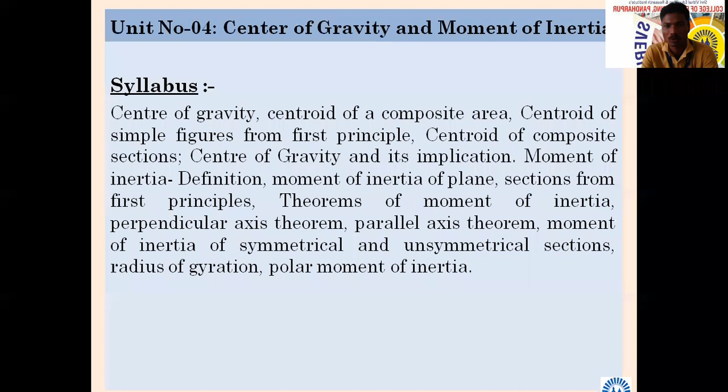Then we have seen the difference between centroid and center of gravity. Centroid is mainly related to a 2D diagram, or we can say a plane, while center of gravity is related to 3D. But in our practical use, we consider both terms as one and the same; there is no difference. So here I have given the formula.

Where I have marked a star, I have emphasized it many times, one, two, three times. This formula is necessary to apply while calculating centroid or center of gravity for a composite figure. We have seen the basic figures for which we can find CG directly, but if our figure consists of a number of basic figures combined, then we have to apply this formula by finding the center of gravity one by one, in that way.

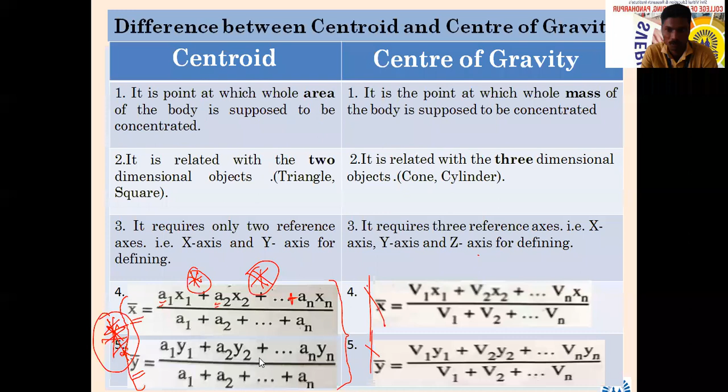After that we have seen two terms: the centroidal axis and the reference axis. Very simple: if the axis passes through the center of gravity, it is called the centroidal axis. It's as simple as that. On the other hand, what is the reference axis? The reference axis is the one which is parallel to the centroidal axis. We discussed a few things here.

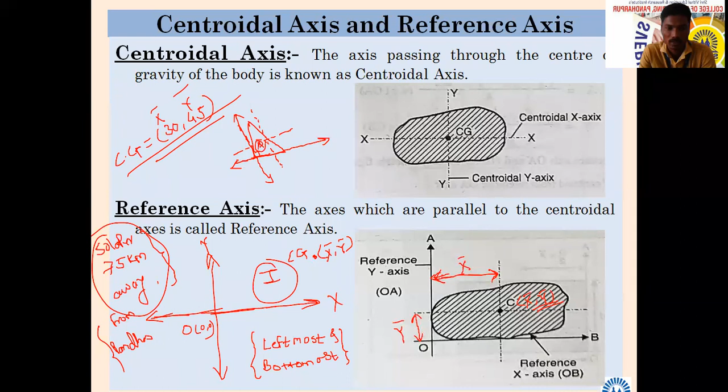While taking the reference axis, we have to take utmost care that our object remains in the first quadrant. I have written this here, I have not erased anything we discussed. So that care we have to take; in other words, while selecting the reference axis, we have to select the bottommost point of the object and the leftmost point of the object. These two things we have to take care of while selecting the reference axis—one is the centroidal axis, the other is the reference axis.

Then we have seen the centroid of standard geometries. This chart is most important, I have told you this earlier too, this chart is most important. Suppose you want to solve or attempt any problem related to this chapter, then this chart is most important.

Without this chart, you cannot solve any problem. There were some questions yesterday related to this chart, intentional. Not only standard, some of the questions were standard figure, but some of the figures I have rotated.

So have you solved, or are you able to solve that question from yesterday? Yes sir, some semicircle, some quarter circle, maybe triangle, right angle triangle, maybe in rotated position. One of the figures I had kept was symmetrical. I don't know whether you were able to apply your logic of symmetry or not. It was not necessary to calculate anything.

One figure I have given something like this in the problem. I don't know whether you are remembering it or not. Maybe there was a rectangle, something like this, and here there is a semicircle, and here also there is a semicircle. So this figure was symmetrical about both axes. So its centroid will be here at the center. I will write here one, for your information.

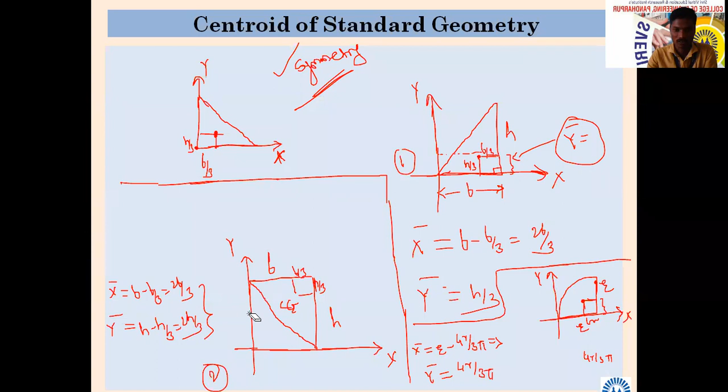Then we actually solved the problems related to centroid or center of gravity. So whatever problems are there, we actually solved it. Whatever it is there in the syllabus. So if object is symmetrical, center of gravity will lie on axis of symmetry. We have to check whether object is symmetrical, not necessary in all cases. So at your first look, you can see how it is, then you can proceed.

So first, what we have to do? Suppose we want to find the center of gravity for any object, what we have to do? First, we have to convert that object into our standard geometrical parts. So if it is possible to convert it into standard geometrical parts, then you have to convert it. Then accordingly, you have to find two things for each standard geometrical part. Which two things is it necessary to find for each geometrical part?

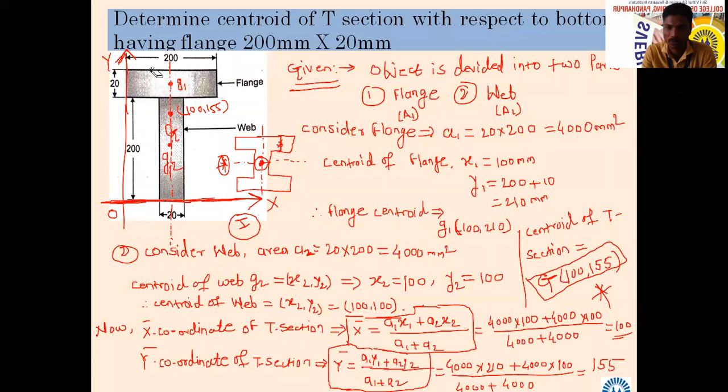Then we can apply the formula. X bar is equal to, what is the formula to find X bar? A composite figure, I will say, the figure which is made with the standard parts. Composite figure, what is that? A1 x1 plus A2 x2 up to so on, divided by A1 plus A2 up to so on. Very good. A1 x1 plus A2 x2, whatever number of parts are there, divided by A1 plus A2, whatever number of parts are there.

Further, we have solved such problems. One T section we have solved, then C section also we have solved. I think this third one, the composite figure made up of rectangle, triangle, rectangle, semicircle, this also we have solved.

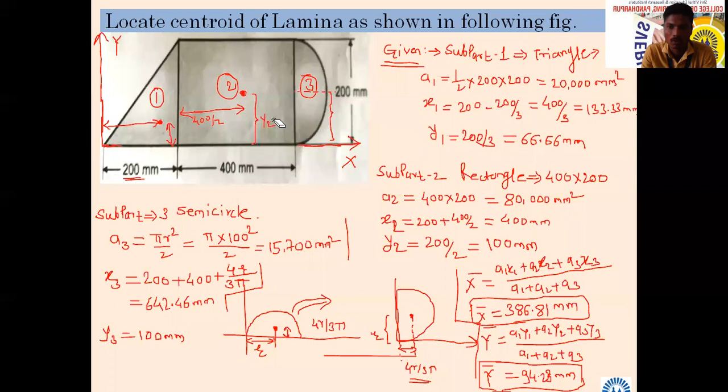Then we came up to this. I think we came up to this. Is it correct? Yes, sir. Okay.

For this question, what is necessary? Just check, read carefully. Determine the centroid of shaded area as shown in the following figure. Which is the shaded area? You can see in the figure which one is the shaded area. Shaded means where there are lines in the area. We need to find the centroid of that figure. Are you able to see the figure and problem statement?

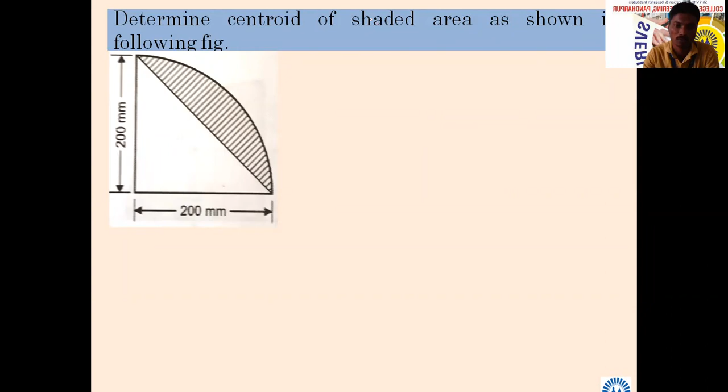Yes, sir. So once the problem statement is in front of us, what do we have to do? Once the problem statement is in front of you, we have to convert it into a standard geometrical part, for which we know how to find the centroid.

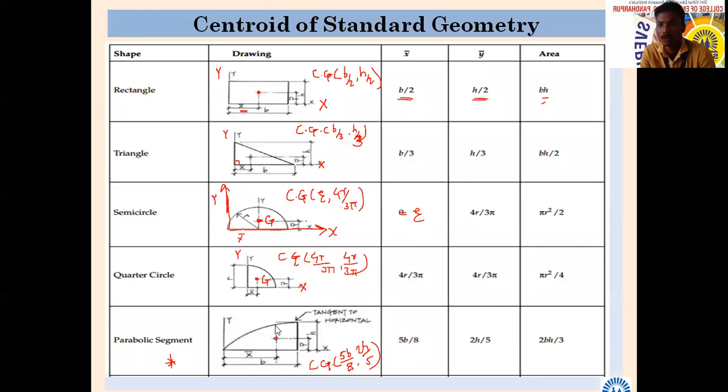By subtraction. By subtraction. Okay, one answer came. With the help of subtraction, we can get it. How? Who told this answer? Okay, who is that, from the circle? Okay, Manasi, go ahead. Tell me how we can get the shaded area by subtraction.

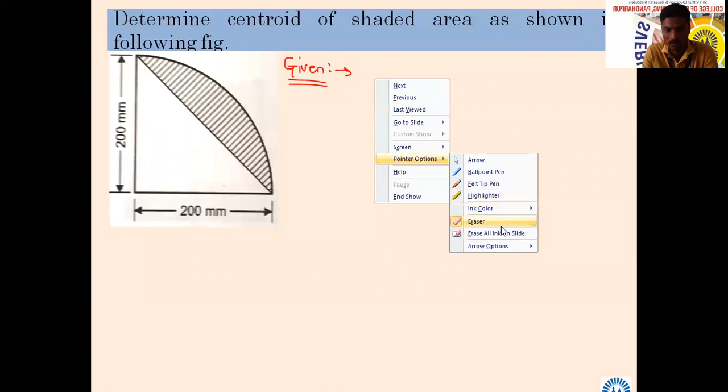Formula. Which formula do you want to tell? A1 x1 minus A2 x2 upon A1 minus A2.

Okay, this, you have told this: A1 x1 minus A2 x2, divided by A1 minus A2. Okay.

Okay, we are going to subtract. You are correct, I want this, but we will go step by step. No, why go directly? You are correct, I'm not saying you are wrong, but we will go step by step. No, what is that?

So shaded area, how will we get the shaded area? That we will see. So how will we get it? Just check: area of quarter circle minus area of triangle. Very good. What is that? I will write it in short here. Shaded area equal to area of what?

Quarter area of circle. I will write in short, a quarter, whatever, or 1/4 circle, I will write.

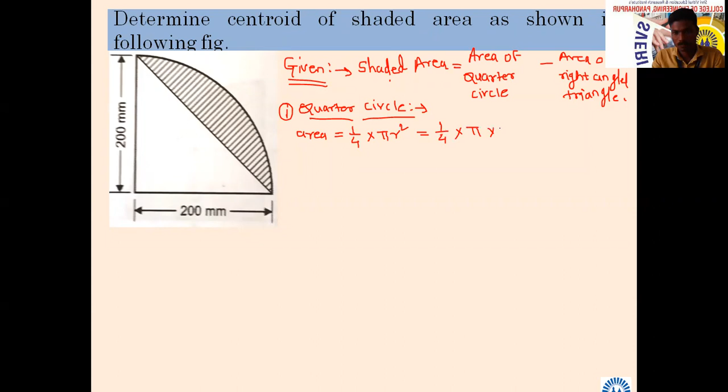200? Is it 200? Are you with me sir? Calculate this area for the quarter circle. Calculate fast and tell me the exact value after decimal points - two things you have to tell.

Are you able to find the area of the quarter circle? I have to find that. 31415.92 mm square. Is it correct? Yes, sir.

Centroid now. Centroid of whose centroid do I want to find? Centroid of quarter circle. So what will that centroid be? Directly it is like semicircle. What is that?

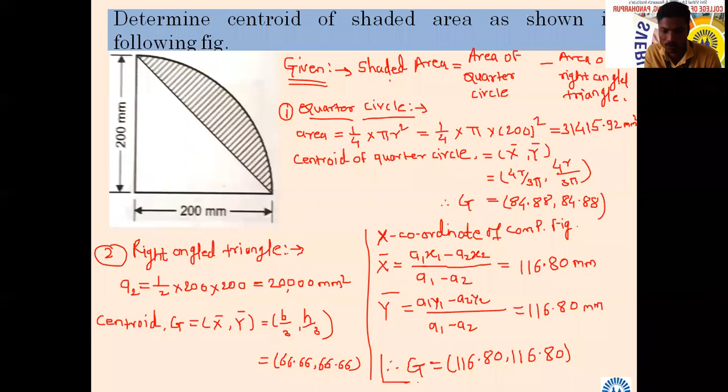Whether you were knowing how to find this. But we have not taken any problem involving subtraction, so that's why I solved it once again. Otherwise I would have taken one problem for subtraction and not asked anyone. I don't know whether everybody has solved it or not, so I solved it quickly. Let it be, so this will be our answer. Anybody got some other answer than this, or is the answer the same?

Whether somebody has a different point? No, same point sir. It doesn't matter, after the decimal point nothing to worry about. Before the decimal point, is there any difference?

Okay, have you got this? Shall I give one problem for solving right now? Sir, is there any problem in this?

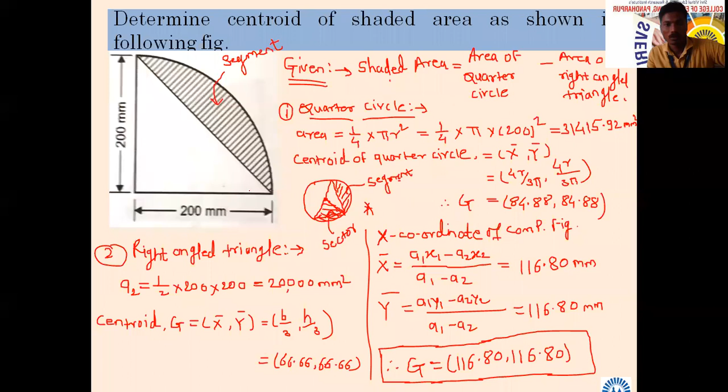Next problem, let us see. Very simple again. How many are there, almost 59.

Roll number 54, Nare, Siddharth, are you there? Siddharth, 54, will you unmute yourself? Siddharth Nare. Very good, random selection of one student. He is also not responding. Akash, roll number 58.

Determine the centroid, continue, of a shaded area as shown in the following figure. Very good, nothing to worry in this. Problem statement will remain same - determine the centroid of shaded area as shown in the following figure.

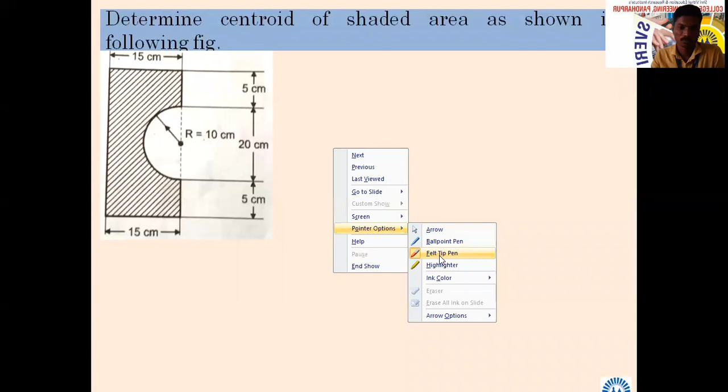Is it possible, Akash, for you to solve this problem? Very simple. If you'll apply your mind, then is it possible to solve this problem? Yes, sir, just check.

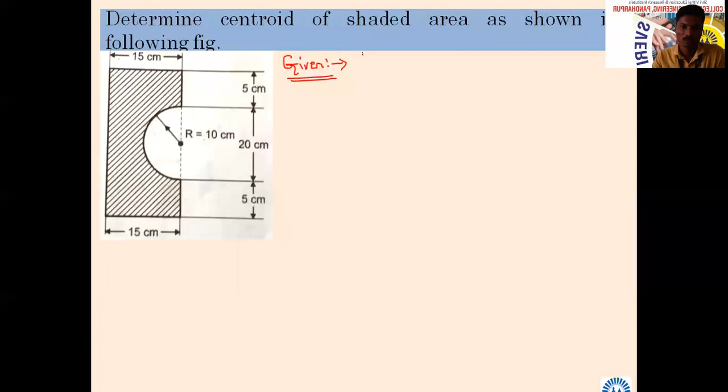Which two standard geometries are here? If I will write - actually this is not a standard formula, for our information I am writing shaded area equal to shaded area equal to. What will be the formula? It will become this for the shaded area. Or will you think for a while? Do you want to take some time?

Hello, am I audible? I'm not getting - are you understanding? Are you writing what you are doing right now? What formula will become for shaded area? Who will tell?

What will be our formula? Rutuja Gaikwad, roll number 7. Area of? So area of rectangle minus area of semicircle. Yes sir, minus area of semicircle. Area of semicircle, area of semicircle.

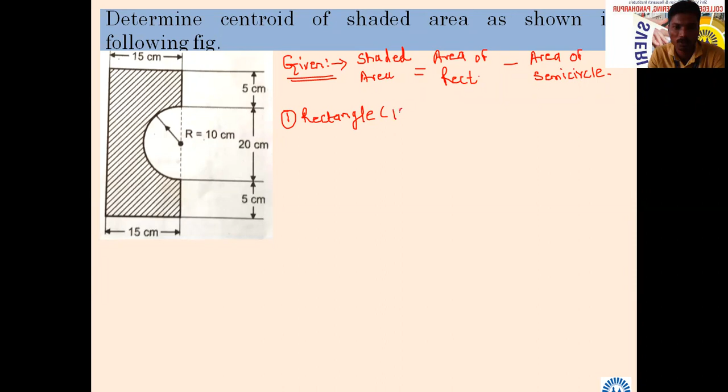Very good, very simple then. First geometry will become a rectangle. How much is its side? 15 into how much, horizontal is 15. What about vertical? 30, 30, okay. For this you have to find certain things.

And number 2, semicircle. Semicircle having radius 10, no? R equal to 10.

Will you solve this? I will ask a random answer. Will you take your time? We'll solve. Is it possible for you to solve this? Either say yes, no, otherwise I have to solve this. Yes sir, solving, yes sir. Okay, you take your time, don't make mistake and then solve.

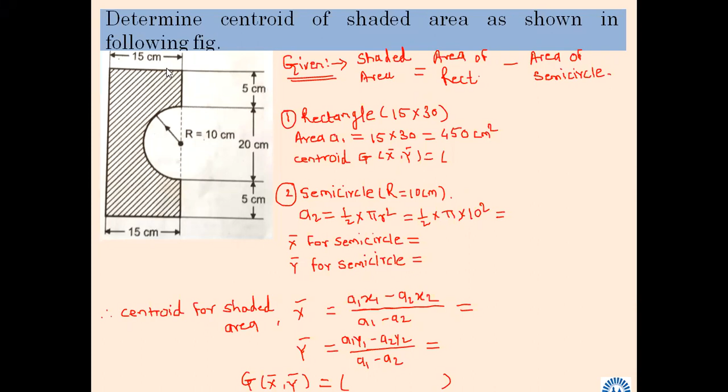Is it over? Yes, sir. Okay.

Mahesh, roll number 38, what is your answer? Have you calculated? 5.57 and 15. 3 point? 5.57, okay. And how much? 15. Okay, good.

Any other? Anybody want to tell, other than this? 5.74, okay. And what is y bar? Who was telling? What about y bar then? Rutuja, I think you are telling. Kavadi, sir, 14. Okay, any other?

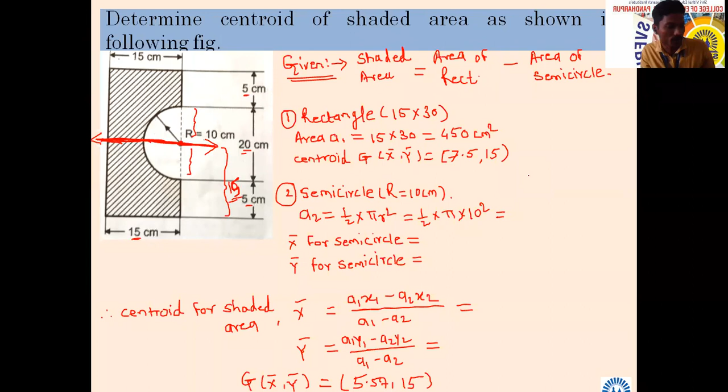For rectangle we have seen the formula. Next, semicircle, A2 is equal to - why have we taken 1/2 pi r square? Because there is a semicircle and we know the value of r, it is given in the problem as 10. What is the area? Will you calculate or do I have to calculate? Calculated. Okay tell me how much it is. 157.07, 157.42 centimeters square.

Very simple. So next, x bar for the semicircle - how much will it be? Who will tell? We have seen for the semicircle standard figure, immediately it should come in front of your eyes. This is x bar, x axis, this is y axis, and our standard figure is something like this.

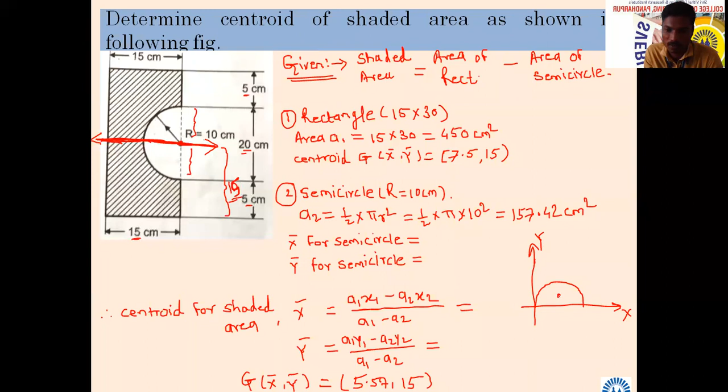Yes yes, okay, here it is a semicircle. This figure should immediately come in front of your eyes. We know how to find its x bar and how to find its y bar. X bar is how much? It is in this way - this x bar will be r equal to r, for this figure I am telling r. And what about its y bar?

What is the formula for y bar? This distance, how much is it, we have seen - what is this? 4r divided by 3 pi, r divided by 3 pi, 4r divided by 3 pi. This should come immediately in front of your eyes, this formula should immediately come to mind.

Okay, but in our figure, how is this object rotated? How is it rotated? In this direction, this semicircle is rotated - it is rotated like this.

In this way it is rotated. Then we have to find x bar and y bar.

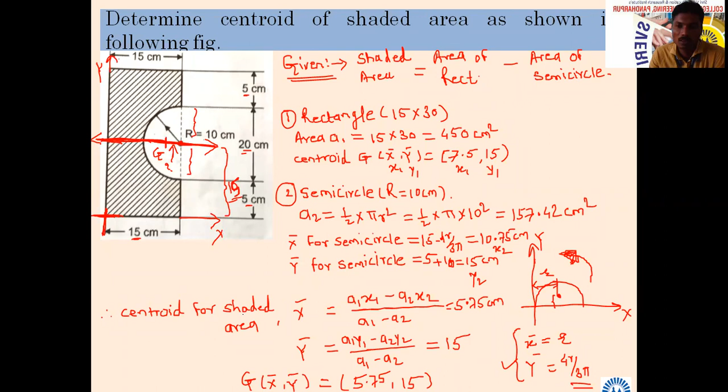Next, university problem we will take. Let us see, university problem, determine centroid. I will read only, I will not give opportunity to anyone. Determine centroid, same problem statement, there is nothing, no worry. Problem from university exam for 12 marks. Out of 70, 12 marks means how much weightage? How to calculate?

Next, I will ask Dheeraj Sawan, roll number 16. Yes sir. Will you apply your mind and tell how we can solve? I will erase whatever Priyanka has told, I will erase.

Priyanka is over, now Dheeraj. Tell me Dheeraj. Yes sir. If you want to contribute, you can. If not, you tell directly, not necessary, or we can say not possible to tell.

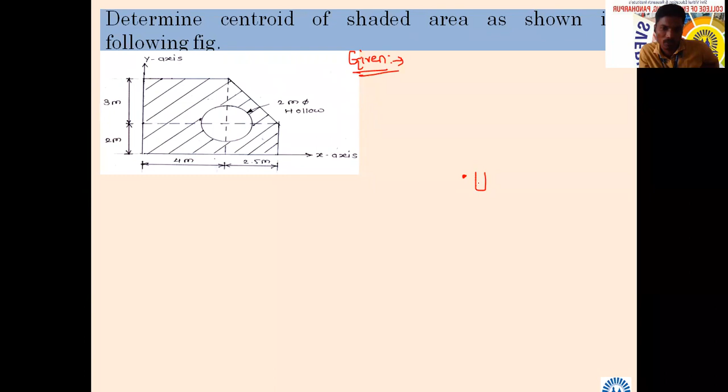I know your admission is from Osmanabad. Okay, Osmanabad - meaning your place is Osmanabad here. I will write U, and here suppose our Pandharpur is P. You need to go from Pandharpur to Osmanabad, right?

Example I will give. So here maybe suppose Solapur, and here it is Mohol M. Okay, here Solapur, Mohol, Barshi. I don't know the exact path. Here maybe Barshi B. Do you know what you do, Rohini?

So what I was expecting - can someone tell me the shortest path to do this? Maybe Sakshi - yes sir, tell me what is in your head, what do you want to tell a little bit?

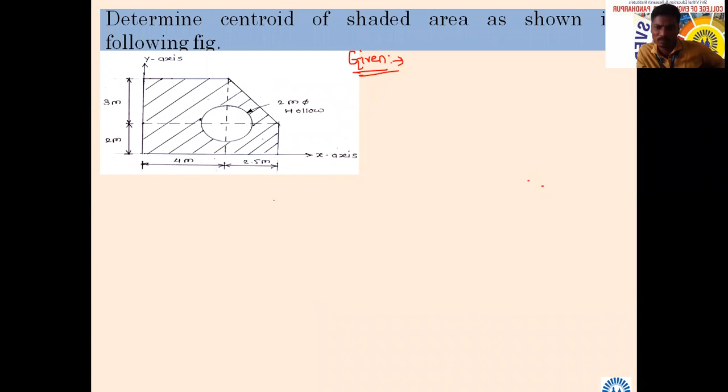Where will it be symmetrical, how? It will not be symmetrical. I think you are also unable to apply the mind, I think.

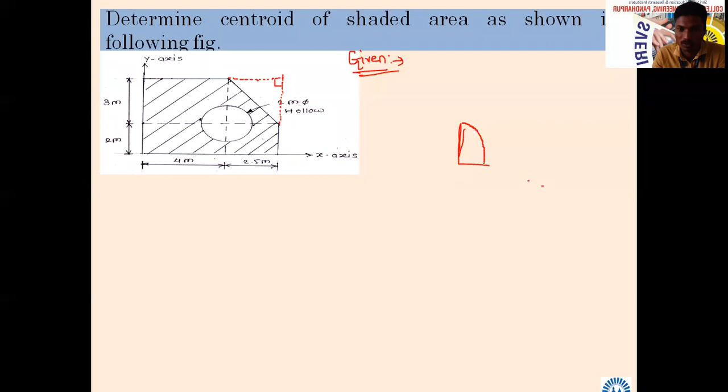प्रत्येकाचे डिस्टन्स तुम्हाला इथं क्वार्टर सर्कल म्हणजे कुठला फॉर्म्युला वापरावा लागतो? क्वार्टर सर्कल. If you want to apply, suppose quarter circle formula, something like this, 4r divided by 3 pi. It is not easy that way to find each and every time 4 times.

Again, you have to see the distance from where. Again, this is not only in this position. In one case, it will come something like this. In another case, it will come something like this. In another case, it will come something like this. It may not be possible in each and every case.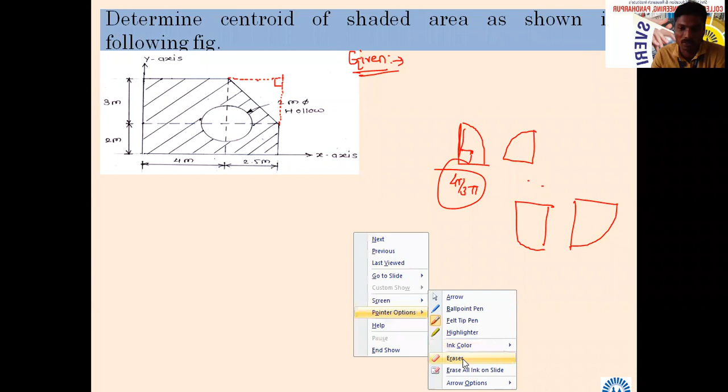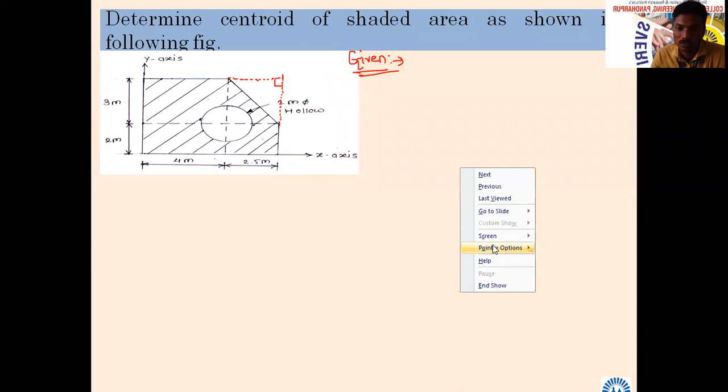येतंय का लक्षात? So application of mind is required. Otherwise, you may reach the correct answer, but it may take time. आपल्याला एक्झाम मध्ये सगळी उत्तरं येतच असतात, पण ते टाइमली कम्प्लीट करणं तेवढंच महत्वाचं आहे. Otherwise, if you are able to solve the problem and you are taking 1 or 2 hours, it doesn't help you.

So what will be the formula here? I will write here for your information. Shaded area equal to what it will become? Shaded area equals area of rectangle. Which rectangle? Which dimension? What is the horizontal dimension for the rectangle?

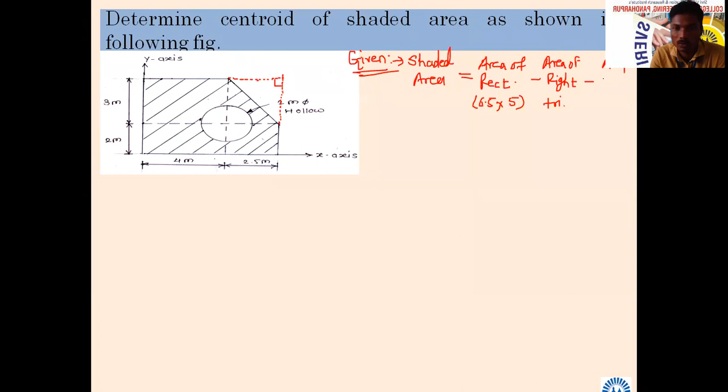6.5, yes sir, into vertical is 5, minus area of right angle triangle, minus area of... here only I will write triangle, minus area of... काय येलो? Area of circle, area of circle.

Hollow, whose radius is how much? It is given 2 meter. Is it that way difficult or that way easy? So do you feel radius is 2 meter? Okay, radius, no, not 2 meter. Diameter असेल, radius sir, yes diameter. Very good. So radius will become 1 meter.

1 meter, huh? That symbol you might be knowing, no? Pi symbol. हा symbol माहिती आहे का तुम्हाला? हा pi, sir. हा diameter.

Okay, so here now, first, any problem in this now? इथे कुणाला काय शंका आहे का आता? नसेल तर आपण सॉल्व्ह करूया आता. Are you with me, or no? येस सर, येस सर. Yes or no? काय yes आणि काय no म्हणताय? सर प्रॉब्लेम नाही आहे पण... Okay, very good, we can continue now.

First, which standard figure we got? First standard figure, rectangle. Very good, rectangle. For rectangle, which is that rectangle? 6.5 horizontal and 5 vertical. What we want to find? First one is A1 equal to.

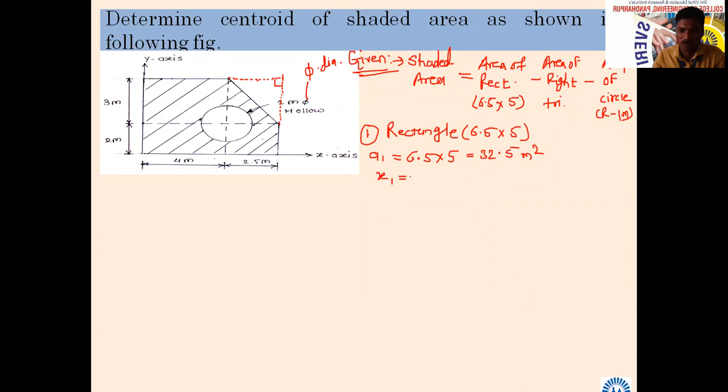X1, yes sir, now I will say specific. Now what is X1 here? X1 कशाला म्हटलं आपण? Pandurang, सांगा बरं जरा. I want answer from Pandurang. X1, to whom we are saying here X1? आपली स्टँडर्ड फिगर आहे पहिली रेक्टँगल, की ज्याची साईज आहे 6.5 into 5. मग आपण आता X1 Y1 कोणाला म्हणणार आहे इथं? हा पांडुरंग.

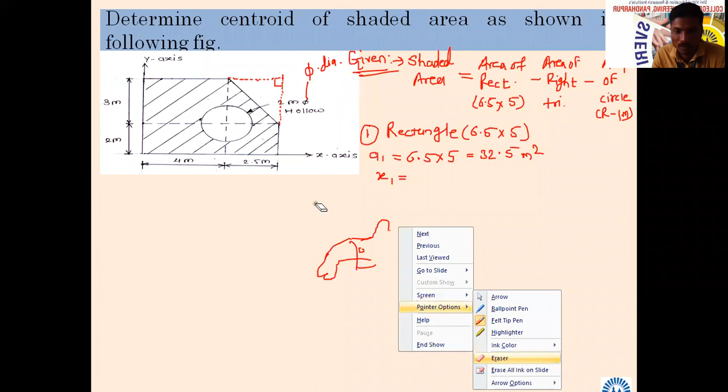असं एक अॅनिमल असतो, सपोज अॅनिमल समथिंग लाईक दिस. आय शुड नॉट ट्राय बट देर इज अ अॅनिमल सपोज. तर काय असतंय, इफ टीचर विल आस्क टू स्टुडंट व्हॉट इज दिस, आय विल ड्रॉ ओनली वन हिअर रेक्टँगल.

ह्याच्यामध्ये एक अॅनिमलचं ड्रॉइंग आहे सपोज, हिअर आय विल राईट अॅनिमल. And if teacher is going to ask what is this, one of the student will tell. एक स्टुडंट म्हणतो की ते टेल आहे, तो टेल कडे बोट करतो, इट इज टेल.

दुसरा म्हणतो लेग, तिसरा म्हणतो इयर, फोर्थ वन इज सेइंग मे बी माउथ अँड सो ऑन. पण असं एक्झॅक्टली उत्तर कोणच सांगत नाही.

मे बी सपोज देर इज अ पिक्चर ऑफ हॉर्स, हॉर्स असेल किंवा मे बी एलिफंट. असं झालंय आपलं. ते काय आहे म्हटलं का ते म्हणायचं ते टेल आहे सर. ते काय आहे म्हटलं का म्हणायचं लेग आहे.

ते काय आहे इयर्स आहेत, माउथ आहेत, काय बाकीचं. नो बडी टेलिंग एक्झॅक्ट आन्सर सर इट इज हॉर्स. असं कोणच सांगत नाही एक्झॅक्ट.

व्हॉट इज x1? दॅट आय एम आस्किंग. x1 म्हणजे काय आहे? आय वॉन्ट दॅट आन्सर सर इट इज एलिफंट, समथिंग लाईक दिस. वन लाईन आन्सर. व्हॉट इज x1? x1 काय आहे इन फिगर 1?

व्हाय इट इज हॅपनिंग आय डोंट नो. व्हॉट इज x1? एक एक पार्ट सांगायचं नाही. तो पाय आहे, तो शेपूट आहे, तो काय तोंड आहे, ते काय समथिंग लाईक.

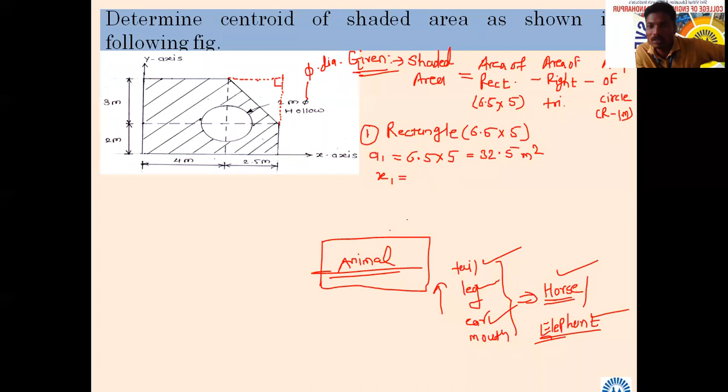x1 इज एक्स कोऑर्डिनेट ऑफ सेंट्रॉइड ऑफ फिगर 1. फिगर 1 चा जो काय सेंट्रॉइड असणार आहे त्याचा एक्स कोऑर्डिनेटला आपण काय म्हणणार आहे इथं? x1. असंच आहे ना? इज इट लाईक दिस?

Yes, sir. आहे का? दॅट ओनली आय एम एक्सपेक्टिंग हिअर. That only I am expecting.

Are you getting or not? What is x1? कोण सांगते? पांडुरंग सांगा बरं आता काय x1? x1 काय हो? x coordinate of figure number 1 or centroid.

x coordinate of centroid of figure number 1. x1 आणि तो किती असेल हो सांगू शकता का आता? सांगा बरं. CG कळालं तर पुढे MI कळेल बरं का. अदरवाइज इट इज व्हेरी डिफिकल्ट. जर सीजीच काढता येत नसेल तर MI ला जाण्यात काय अर्थ नाही.

हा, what will be x1? Who will tell what will be x1? 3.25. Direct. 3.25. How you have calculated?

You might have did 6.5 plus 2.5. Sorry, not 6.5, 4 plus 2.5. No. Yes, sir. Yes, sir.

So 4 plus 2.5 divided by 2 equal to किती आला सांगा आता.

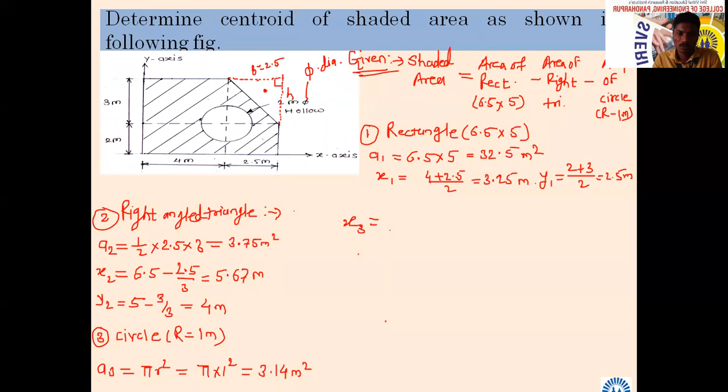Next, x3. What is x3? R, what does it mean? 4 meter. R means how much? Now did we study standard geometry for a circle before? No, we hadn't. Okay, if it is not, okay. If it is a circle, its centroid is at the center. Circle's centroid is at the center, it is as simple as this.

Further, if it is something like this - suppose it should touch in this way - then at what distance will this circle's R be? So G should be at R. If its radius is R, maybe this is R and this one is R. Center - its centroid will be at its center, R. Same logic applies. So where will the centroid of this be? Here, it will be here. So what will x3 be in this case? You apply this logic for this figure. 4 and 2, tell me. 4 and 2.

Are others able to imagine, will everyone get what will come for sure? Yes sir. How did we get 4 and 2? Because we need to go up to that centroid. x3 equal to, now directly, 4. Now here there is no question of addition or subtraction, directly it will be 4 meter. And what about its y3? Directly from the base it will be 2 meters, directly, there is no question.

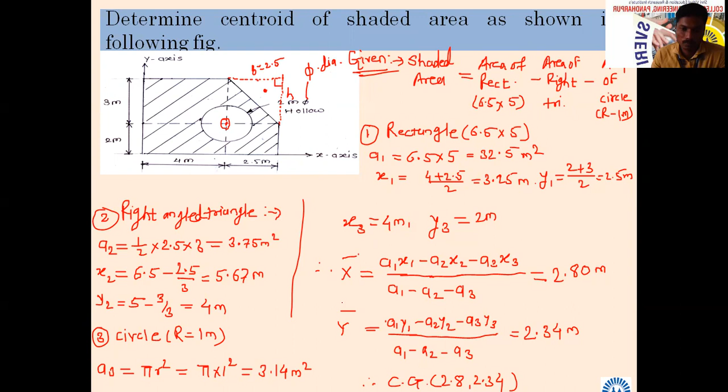Just check whether answers are coming same or something different. Others also please calculate, don't copy paste. It will not help you. Keep in mind, if you just copy paste, it doesn't help you in your final exam.

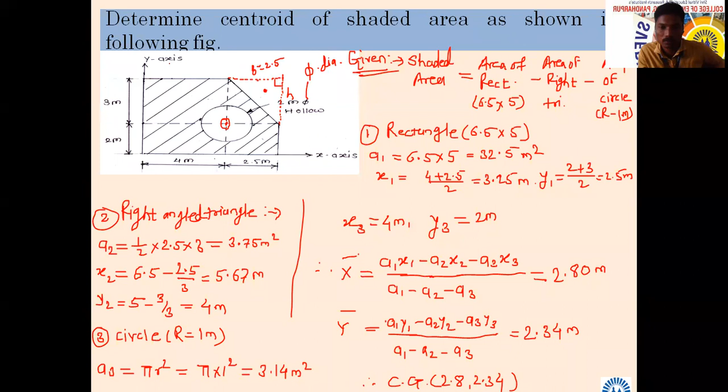Are you with me? Shall we go to the next problem? Any problem related to this? If not, let us see the next problem. I also want to see how this next problem goes. Again, a simple one. After that, I will give one problem for homework.

Determine centroid of shaded area as shown in following figure. Again, this is from a university exam. You will find it in our assignment booklet. There is a further part, but I have just taken up the centroid.

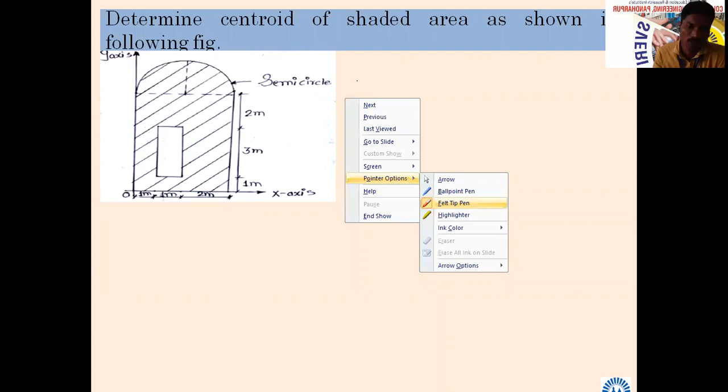Will you solve this? I will give certain time, 5 to 10 minutes. Try on your own first. Then we will see how we can solve it. I will not guide in this regard, you should try on your own. I will give 5 to 10 minutes, then we will solve.

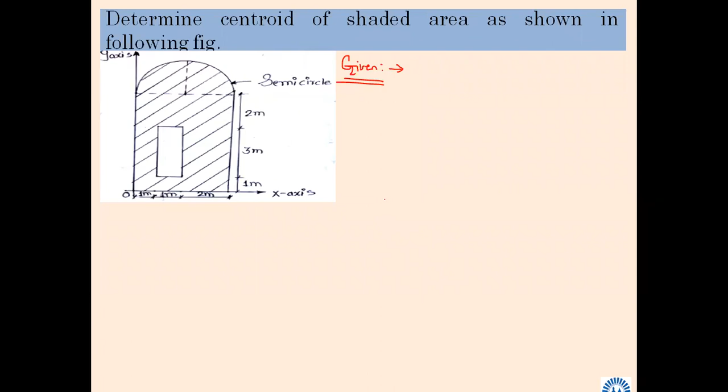Completed? Others? Dipali, roll number 3, have you got the answer? Roll number 3. Yes, sir. Dipali, what is your answer? Have you got it?

X bar 2. Correct, 2 point... 0.05. 2.05. Okay, Y bar... 3.94.

3.94. Are you telling your own answer, Dipali? Or is someone guiding you? Dipali, be confident, are you telling your answer or is somebody guiding you? No.

Hello. Very good, mute. This is the shortcut to not answer. Mute yourself, do whatever. Good shortcut you got.

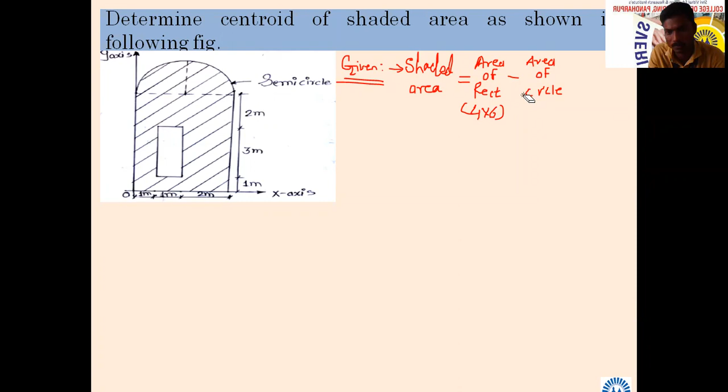Plus, sir. I don't know what you have written in your notebook. Semicircle, what will be its radius? You guide me first. 2. What will be its radius? Radius 2. Very good, correct.

Whether this much will give us the shaded area or something else we have to do. Anisha, fast. Is it sufficient to get the shaded area? It will do addition of rectangle area and semicircle area. Shall we get the shaded area or do we have to subtract something?

Sorry sir, I cannot say further. Very good, no issue. I will ask Pranita, roll number 22.

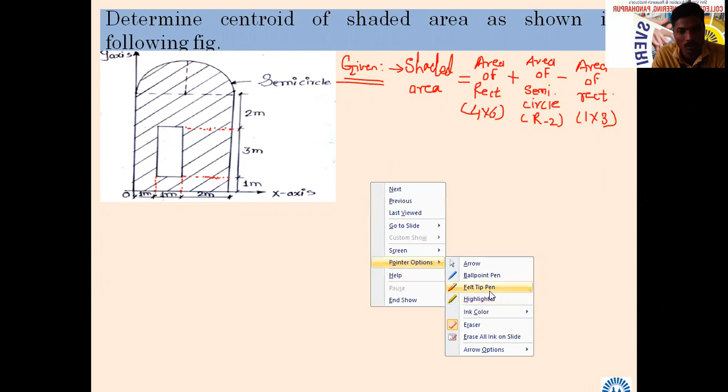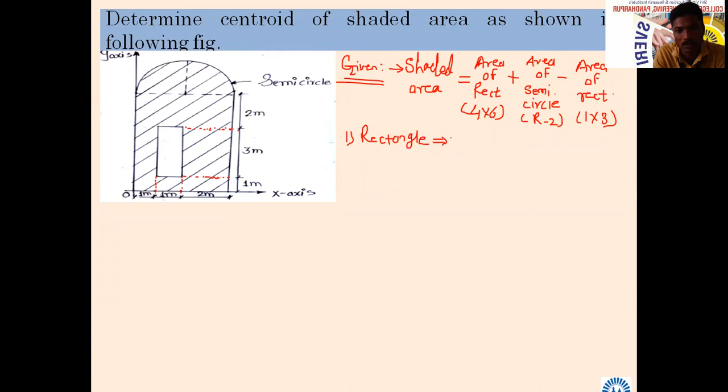Number 1, what will be that? Which figure are we going to take? Number 1. Area of rectangle, very simple. So first we will take the rectangle. What is that rectangle, what is its size? 4 into 6.

So A1 is equal to, what will be that? 4 into 6 equal to 24. 24 meter square. Very simple. X1, what is X1, Vishwajit?

Yes sir, what is X1 in your language? What is X1? 6 by 2, sir. X1 is the X coordinate, not component, X coordinate, not component. What is that? Tell me.

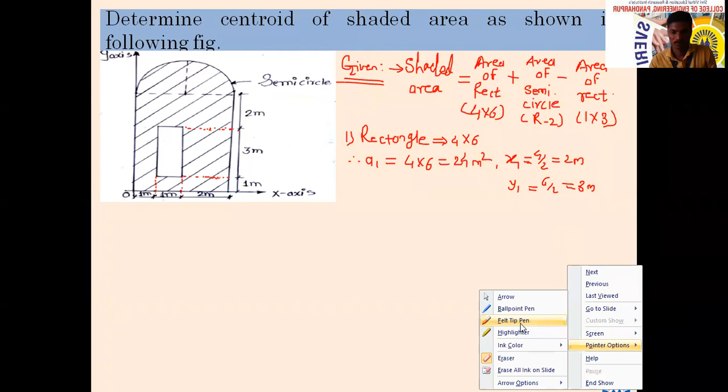This is for figure number 1. Next now, figure number 2. Which one will we take for figure number 2? Semicircle. Correct? Semicircle, of radius how much?

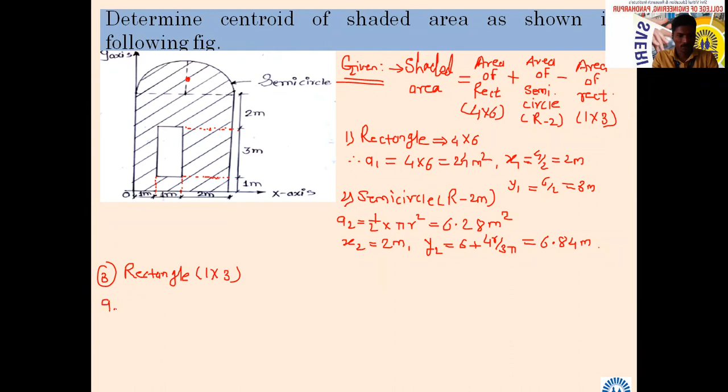Next, A3 equal to how much? 3, A3 equal to 3, 1 into 3 meter square. Very good. X3, what is X3?

What is X3? X coordinate of small rectangle. Very good. X coordinate of centroid of that small rectangle. So it will become 1 plus 0.5 equal to 1.5 meter.

What is Y3? 2.5. Y coordinate of centroid of small rectangle, that is Y3. What is that? 1 plus 3 by 2 equal to 2.5. Yes, sir.

Therefore, for composite figure, x bar equal to, who will tell the formula? A1 x1 plus A2 x2 minus A3 x3, divided by A1 plus A2 minus A3.

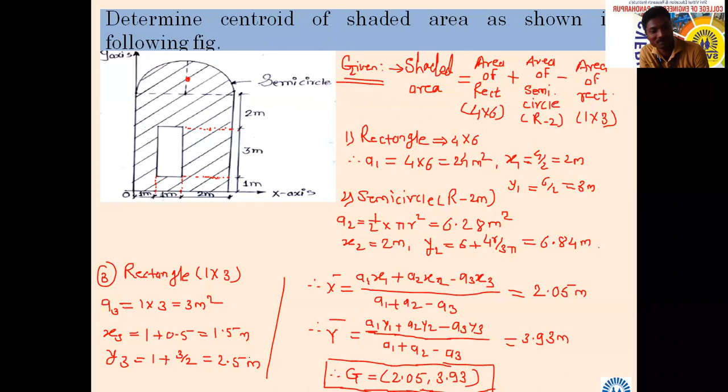Okay, shall I go? No problem for homework. Please note, just check, is it possible to solve?

Shall I tell the answer to cross check? You can try on your own. No, sir, no. Okay, if you don't want, I will not tell. But try to solve this.

Very few problems we are going to see related to moment of inertia. This chapter will get end. We are going to start thereafter dynamics. Try to just note it down. I will take attendance meanwhile, within 2 minutes, then we will stop for today.